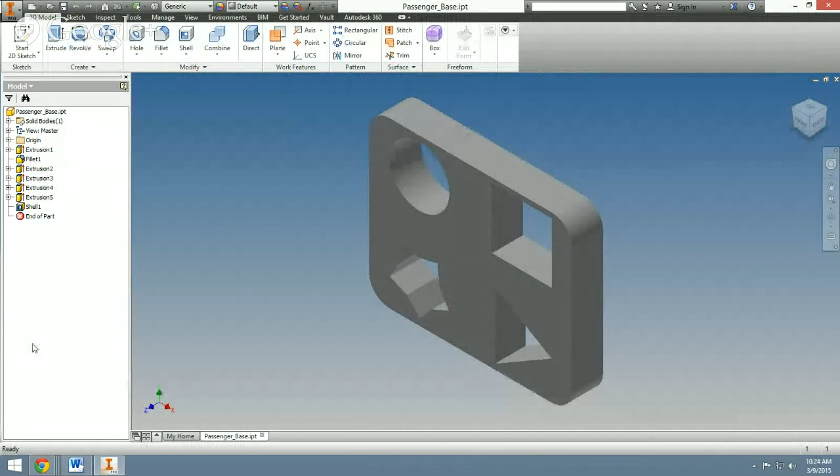So just before I get done, I want to make sure that I save my project. So save as passenger base. I've already saved it once already, so it's just going to ask me to replace it. I just go yes, and that's okay.

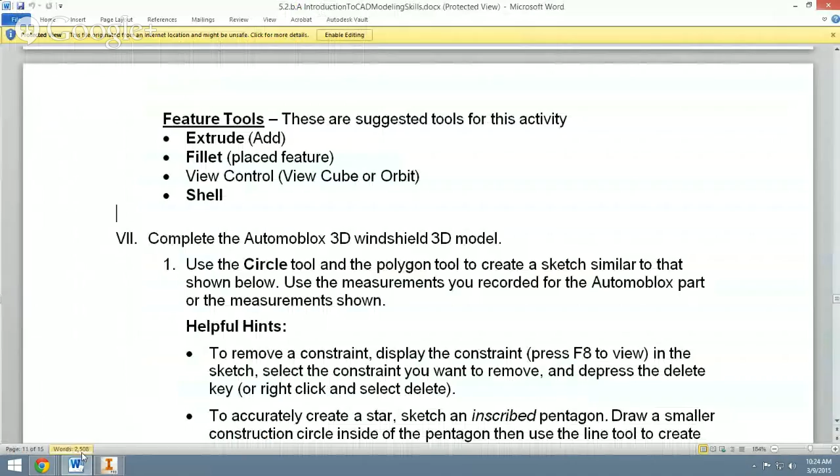Okay, so I want to make a new part file, and we're going to be trying our Automoblox wheel. And let's find our directions here. So, a simplified version of our wheel is what we're going to do. And here we have our drawings that we're going to look at. So it looks like it's 0.57 deep, so that's what I'm going to be extruding to.

Now it looks like it has two pair of kind of offset circles. So all I'm going to do is make my first circle at 0.44 diameter. And then I'm going to just make another circle right in that and then offset with 0.05. Offset another one with 0.35, and then offset another one with 0.05 that way. Okay, so let's start this off.

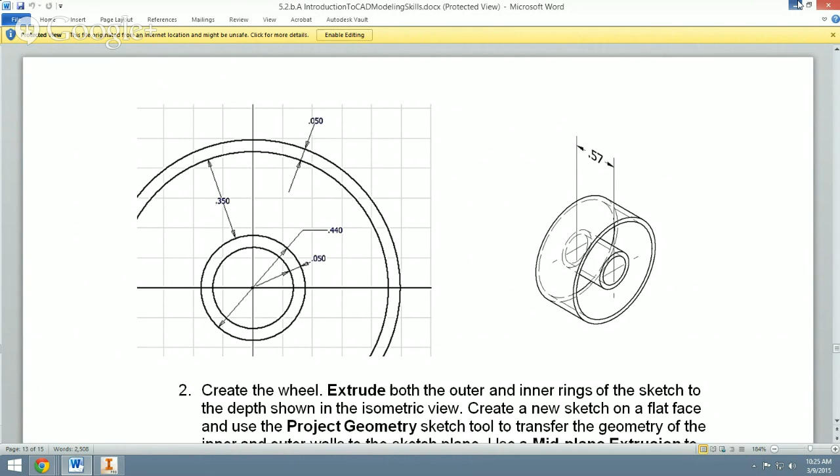I'm going to choose to draw it on this plane today. Circle, a diameter, I said I was going to do my 0.44 inch diameter first. Go okay. I'm going to make 3 more circles here, so I'm just going to draw them on.

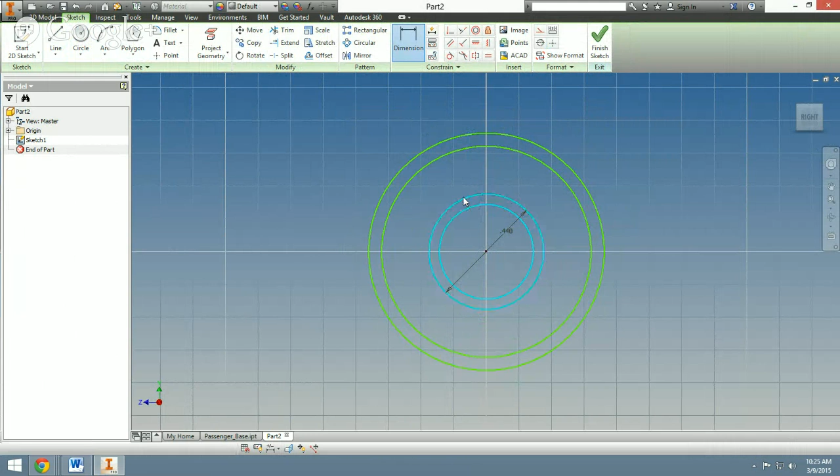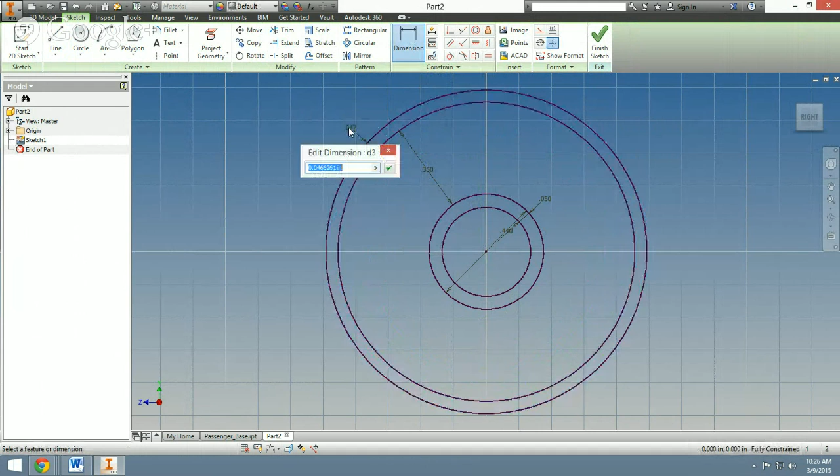Okay, and now I'm going to take my dimension tool, and between these two I'm going to have a 0.05. Between these two I'm going to have 0.35. You make this one just a bit bigger. So I just escaped out of everything and made it a little bit bigger. And then between these two here, I'm going to have 0.05. Okay. So there we are.

Finish that sketch, and I'm going to extrude. Now I get to pick both of these. Okay, and I'm going to extrude to 0.57. So there we have it. It's just that easy.

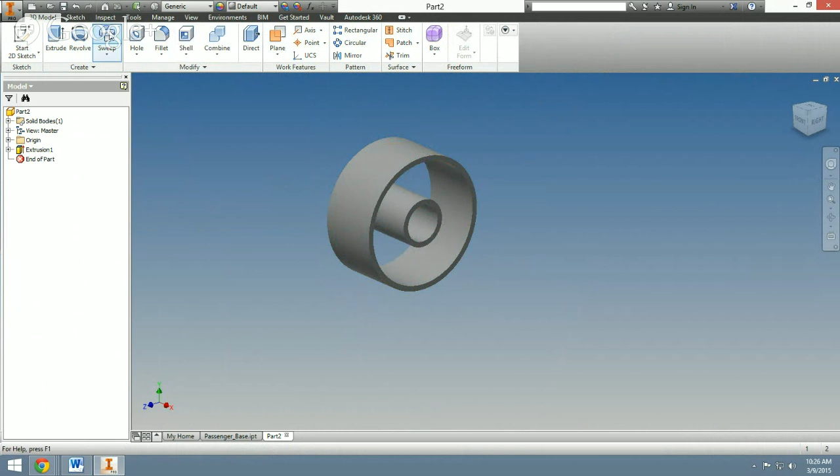The next thing I need to do is I need to add more material on here, but I want to add it in a very specific way. So I'm just going to start a sketch. I'm going to pick one of these faces, so I'm going to use that plane in which to make the sketch. I'm going to draw over the top here. And I'm going to put that material, let's say, I should have it a little bit overlapping, but really that's okay. I'm just going to make it look like the picture. So it's going to be right here.

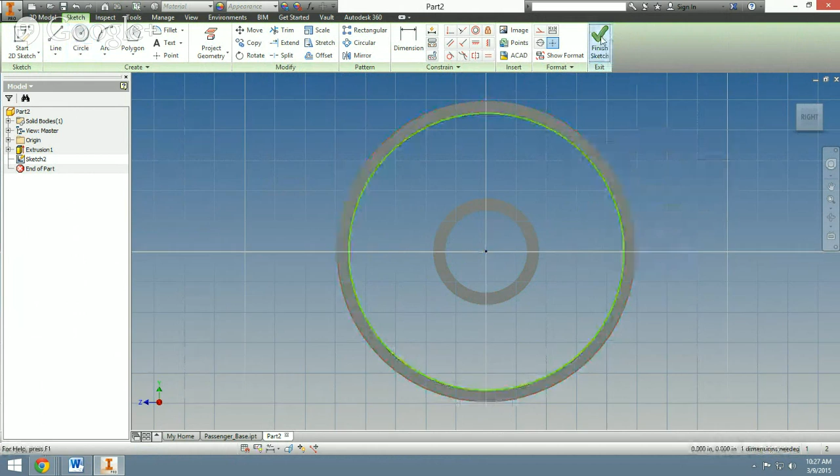Okay, finish. And I want to extrude what I just drew. It says 0.05 inches, but I want it to be 0.05 inches symmetric. So I want part of it to be extruded in, part of it to be extruded back. And we're just going to leave it like that.

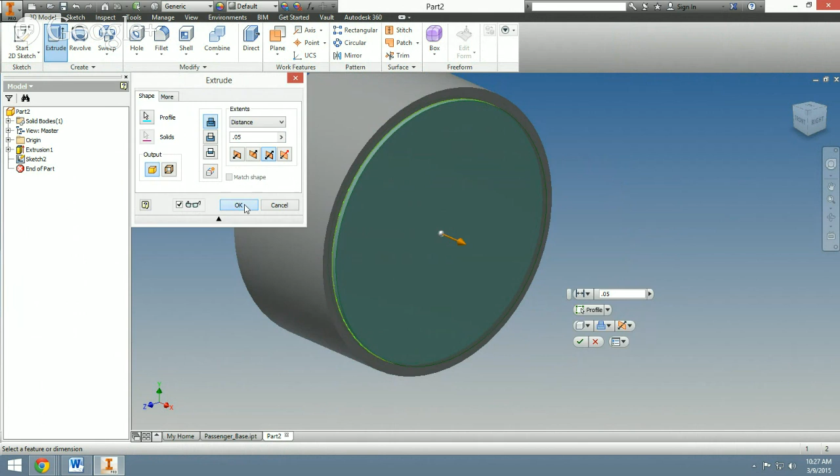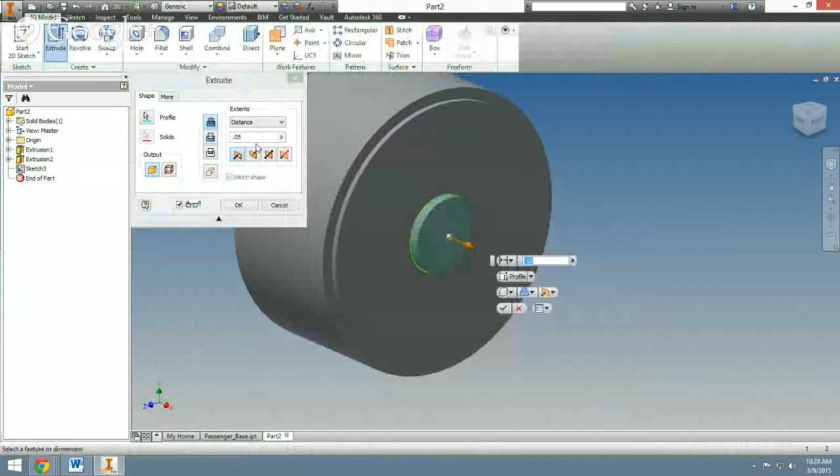Okay. And now there's one more thing I do need to get back in. Notice I can see my other lines over there. I'm just going to grab a circle and go to that projected geometry. Notice how that snaps to what was drawn previous there really, really nicely. Okay. So I'm just going to snap here. Okay. Finish. I'm going to extrude this one, but I'm going to cut it. So I'm going to cut all so that now we have the same picture as we have right in our books.

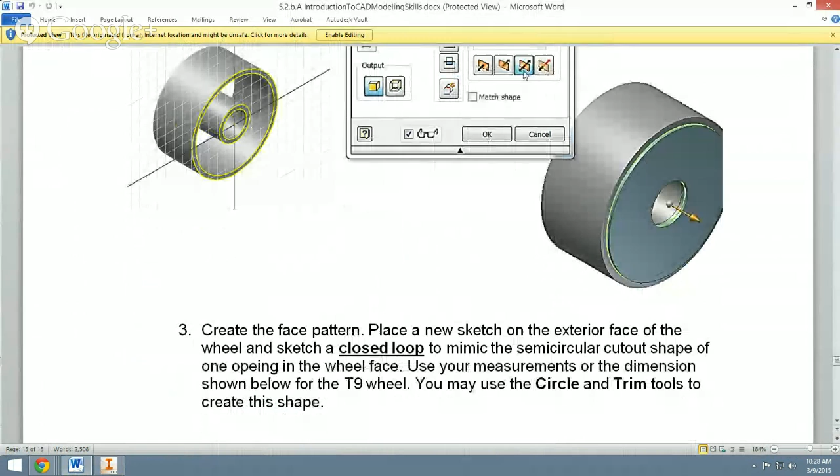Okay. So that's what I'm looking at right now, and that's what I was looking at, this picture down here. Okay, notice they selected this midpoint, that symmetric extrusion. Okay, so I have that part. I can turn the page, and now I need to start drawing this circle right here, and I need to cut that out.

Couple different places. We're going to do it different than this guide has done it. We're going to create this, we're going to extrude it, we're going to cut it out completely, and then we're going to make a pattern around this wheel. I'm going to show you how we're going to do that real quick. But let's just grab our dimensions.

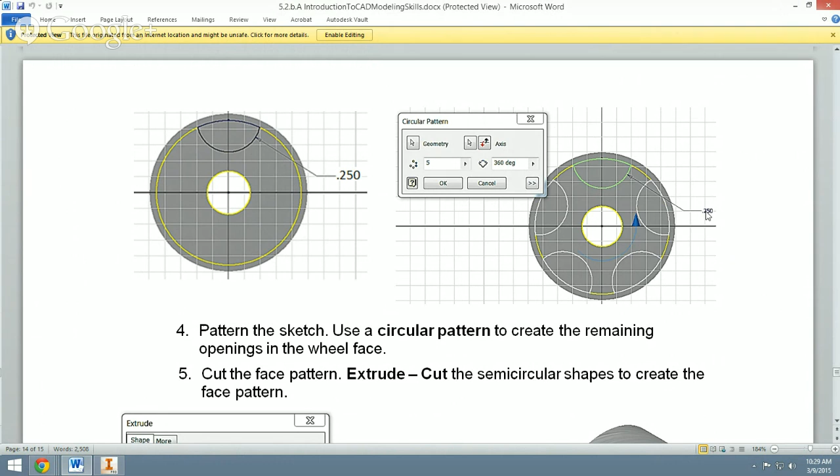It looks like this circle starting at, looks like the midpoint of this big circle and just our plane line, our y-axis. I should be able to snap right there, create a circle with, now this should be a radius of 0.25. It's not clear, so let's just look at what we have. All right, circle.

Good, I was able to snap right at the, it looks like x is 0, y is 0.57, that's exactly what I wanted. So if I was talking diameter of 0.25, this would not be big enough. I should have a radius of 0.25, which would give me a diameter of 0.5. I'm going to go 0.5.

And now we're going to use some things that we have not used before. We're going to use the trim function because I don't need the rest of this circle right here. I just don't need it. It's not part of my drawing. I don't need it anywhere. When I trim it out, that's what I'm left with. And that's exactly what I want.

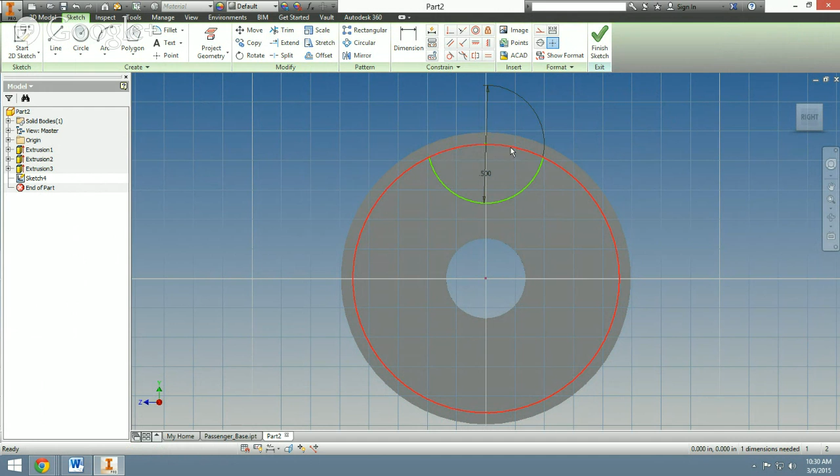Now, I should be able to make an extrusion based on this line and this line. So let's see if we can do that right now. Extrude. I can select it, so that's good. I'm going to cut it out. Distance of all. Okay, now looking straight at it.

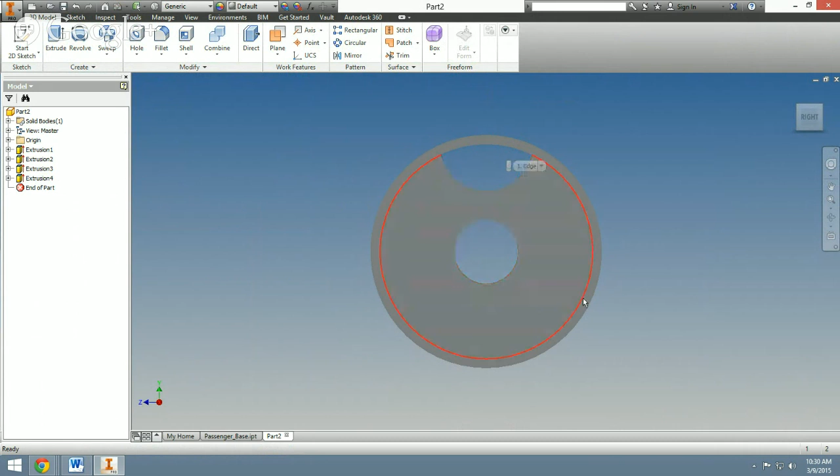Here we are. I want to copy this, what I just cut out of there. I want to copy it around. It looks like 1, 2, 3, 4, 5 times. So 5 in total I want on here. And we can do that very easily. So I am going to take the circular pattern.

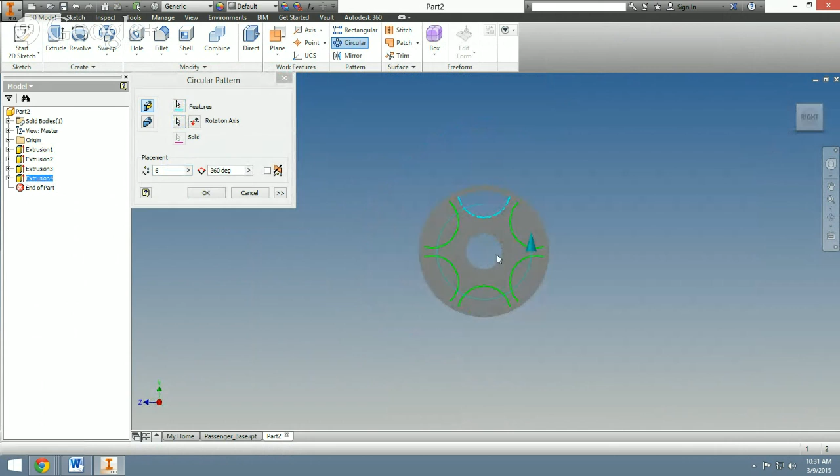It's asking me which feature I want to copy around. This feature right here. Rotation axis. I'm just going to pick the rotation right there. So all I did was select this circle. And now it wants to rotate it. It wants to do it 6 times. I don't want it 6 times. I only need it 5. And notice it puts those 5 on there for us. So I have everything done. I'm going to click OK. And notice it cuts all those out for us.

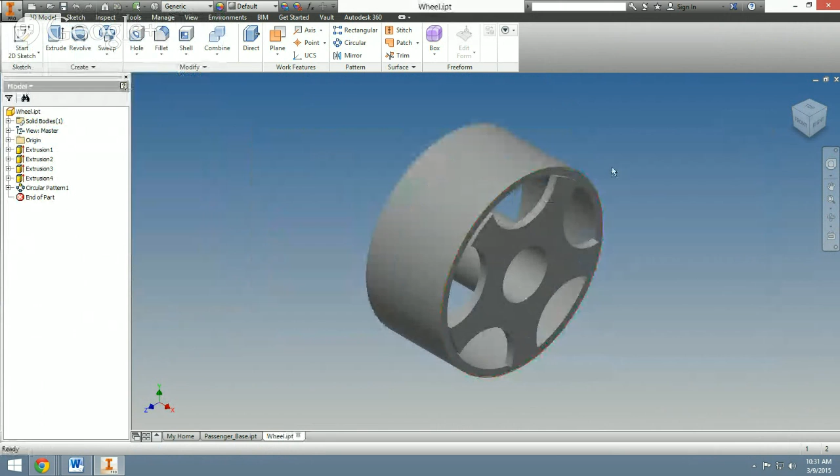Okay, so now that I'm done, I want to save it. This is my wheel. And there we have it. We can give it a coloring, expanded metal. Ooh, that's a fun one. How about cast iron? Cast iron. Or nickel. I like nickel. That's a cool one. Okay, so that's it for your Automoblox wheel.